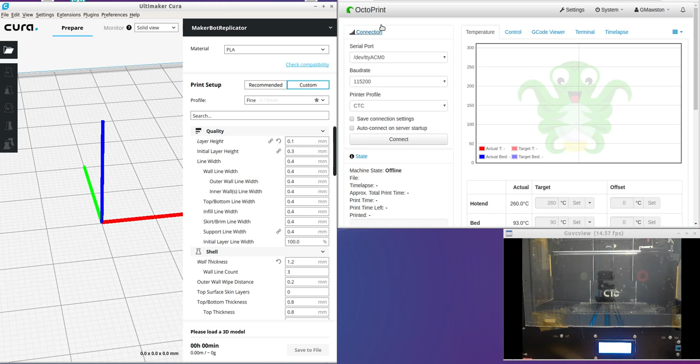Hello everyone, this is going to be a video about 3D printing. For those who aren't interested, feel free to switch off, but for those who are, this is my run-through of how I got Octoprint to work with Cura 3.2.1 and the steps I needed to go through.

So I'm quite happy to use Tinkercad. I'm just going to do a quick cylinder, nothing fancy, let's make it a little tiny one just for the sake of it. So there we go, we've got a nice little cylinder, 1 centimetre by 1 centimetre.

All I want to do now is export that as an STL. So I've got my file. Just an FYI, don't open it.

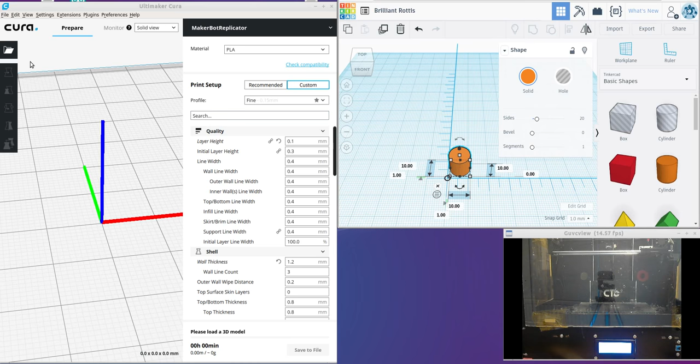All I want to do is go into Cura, click on open. This is all my downloaded files, so you can see I've just done that now. Open it - hey presto, there's the cylinder.

Now the next part, I'll run through what I've got set as my printer - this is for the CTC clone MakerBot. So I'll manage my printer. What I've got, and what helped me out, is you've got to have your X width of 225, your Y is 145, Z is 150, build plate rectangular, origin center, and heated bed.

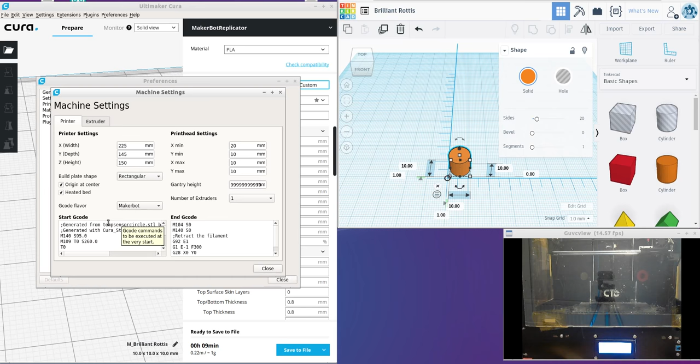Now down here I've got my own specific Gcode start, because generally if you use the normal one it just doesn't work quite right, but these are all fine and I'll show you what I do anyway. So I'll close that - obviously it does all the parts, so this is going to take about 9 minutes to do.

Let's take it down to 0.2. So all the functionality within here is all available, and it's got about 5 minutes. So what I'll do is click Save to File.

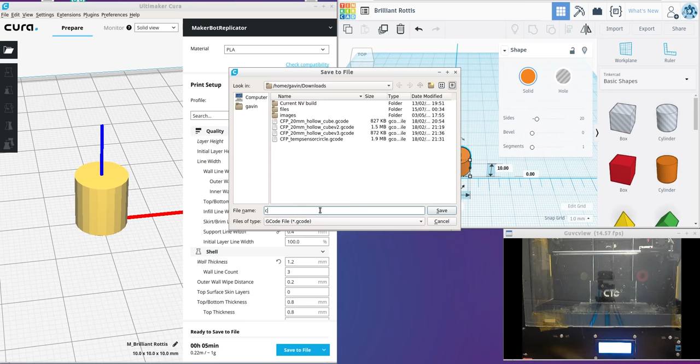I'll call it Cura 3.2.1 OctoPi Gcode, and I'll save that.

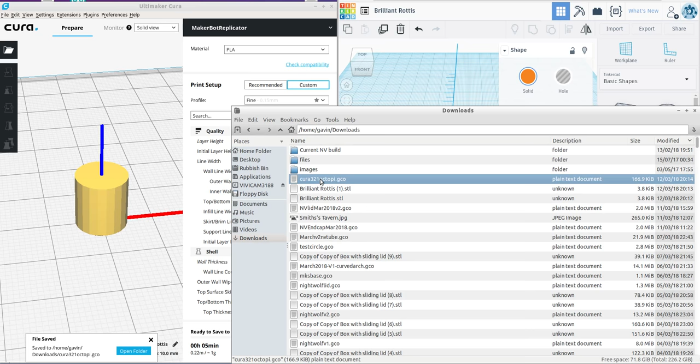That's done. Now what I then do is open up downloads. This part here below is all the elements I've had - up to there is all my Gcode that I've put on.

I'll put this in the description so you can copy and paste it. The only real ones I play around with are the bed temperature - the 95 and the 260 for my ABS. I take all this out.

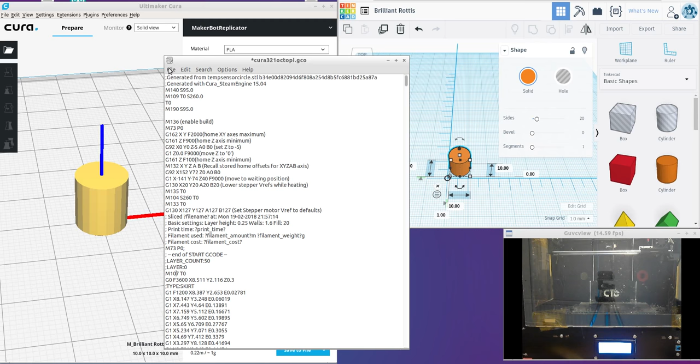So what I'll do is click on Save, and that's it. Then I'll go back and connect to my Octoprint, so the usual kind of connected via your local or IP address. So that's now connected. I upload.

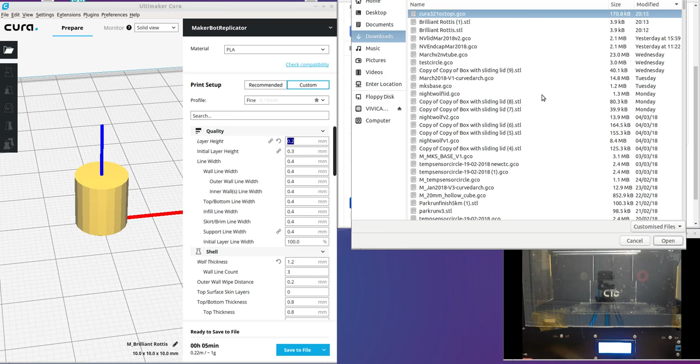I've got my Cura 321 OctoPi. Click on OK. Then I try to remember what I've just called it - there we go. And click on print.

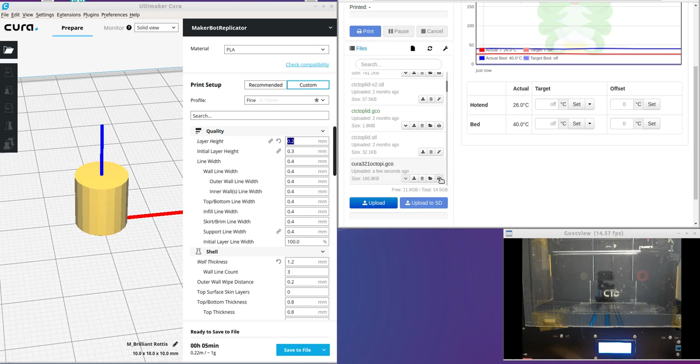So now we can see with the OctoPi it's going to heat the bed up - let's see if I can just get you on there. So it's going up to 95. This is where we wait.

Which you can see, I still need to sort out the slamming to the side, but I'll get round to that.

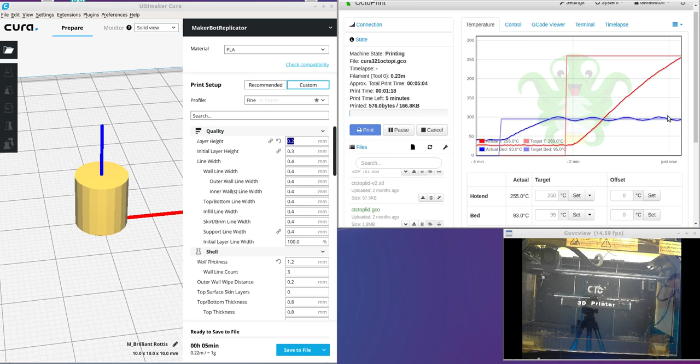So there we go. That's how to get it printed away.